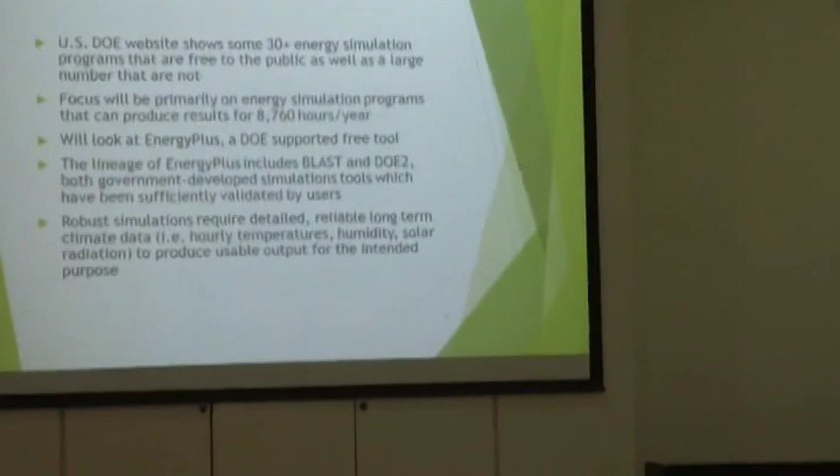So next slide. This is kind of an overview of simulation models. And when we're talking now about simulation, I'm talking about whole building simulation. Annual simulation of the building, all the systems in there, the components in the building. So probably some of you, how many people in here are actually modelers or simulators or have had any experience in that? A few. The rest of you might just be clueless, but this is 250,000 lines of coding that actually simulates a building on an hour-by-hour basis under the influence of all the climatological variables.

And so if you go to the United States Department of Energy website, which anybody can do, there's about 30 plus or so energy simulation programs that are free to the public, as well as a large number that are not. Their focus is really on energy simulations, so it's what we call the 8760, that's how many hours there are in a year. So they just march through the year, and that's what they do. Every hour, they try to bring the system to equilibrium, and then they calculate the energy.

We're going to look at Energy Plus, which happens to be a DOE-supported free tool. What that means is that anybody, anywhere in the world can download that if you want to. Now, I can tell you that if you've never run an energy simulation before, you're going to get into tall weeds very quickly.

Not easy. That's why there's not a whole lot of us that do this kind of work, because you kind of got to be about half crazy to do it. It'll drive you nuts most of the time. I'm completely crazy, but Bing was only half crazy, so she got to do the work.

The lineage of this was a couple of programs that existed from various government agencies in the United States. The old BLAST and DOE2 became the new Energy Plus program. Interesting thing was we had one government agency writing one program, and another government agency writing the other program, and they both did basically the same thing. The weaknesses of one matched up with the strengths of the other and vice versa. So I walked into a meeting one day in research and said, why do we have two of these? That caused Energy Plus to be built from those things coming together. I didn't want to write them, I just wanted to use them. I didn't understand why we had to make choices between the two.

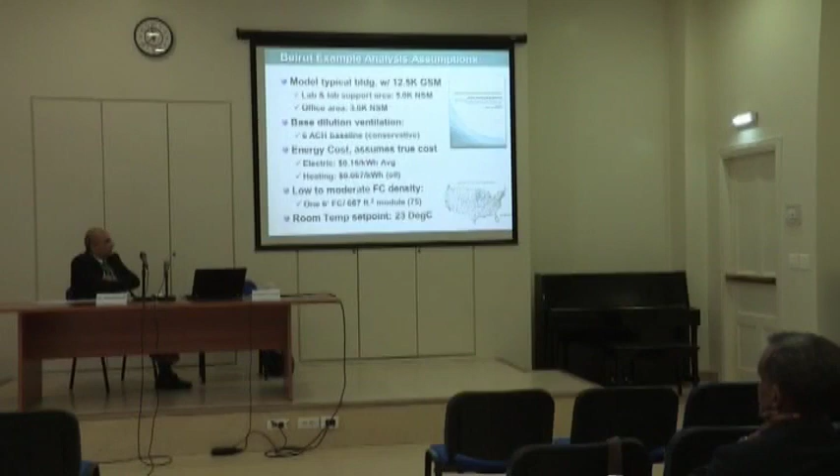Basically what we have is a dilution of a baseline of about 6 air changes. I've got some energy costs here, and basically normal set point temperatures. So when we apply that, the base cost of using the 6 air changes runs at about $615,000 per year.

You can see how that breaks down between cooling, a little bit of heating, some reheat, and then some fan power. We then apply the demand-based approach to that to bring it down to 4 during the day, 2 at night. That's roughly about half the flow, or an average of 3 versus the 6.

So here is the baseline, and now here's the new energy use, obviously less than half, about 53% reduction, and a payback in this case was around 1.6 years. Again, very significant reduction, because we can reduce that airflow rate.

Lastly, I just want to briefly talk about demand control ventilation in commercial buildings. When we talk about laboratories, what about in commercial buildings? The concept, again, is called demand control ventilation. It's been around for a long time. You've probably heard of it. It's recommended by ASHRAE. ASHRAE 62.1 specifically recommends this approach in the standard.

And the problem is it hasn't worked that well, I hate to say. There have been some articles talking about this. The problem is that the traditional sensors that are used tend to drift, as I mentioned earlier.

This is a study done by Lawrence Berkeley National Labs, showing that out of 44 sensors they surveyed in the San Francisco Bay Area, where they're located—again, a Department of Energy laboratory—they found that the far majority, about 80% of the sensors, were drifting high by almost 40%. These sensors should be accurate at 3 to 5%, but they were obviously significantly higher than they should be. If the sensor thinks there's more CO2 in the room, it thinks there are more people in the room, and it drives more flow.

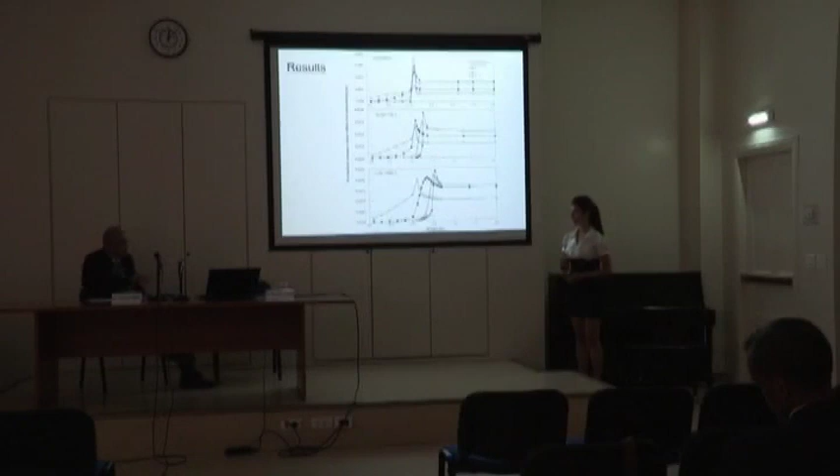As we are mainly interested in reducing cross-contamination between occupants, the intake fraction, which is the normalized concentration at the breathing level of the exposed person, was examined.

To begin with, for a flow rate of 50 liters per second, you can see that for diameters between 1 and 5 microns, the intake fraction increases with particle diameter. However, for particle diameters larger than 5 microns, the intake fraction begins to decrease.

But why? I just said that when the particle diameter increases, the particles accumulate and the risk of cross-contamination increases. However, we should not forget that gravitational effect can play a positive role if floor deposition can overwhelm the upward motion. However, the positive effect created by floor deposition does not cover the entire inhalable range; only for particle diameters larger than 5 microns does this effect become positive.

So we cannot use 50 liters per second, because although floor deposition can act as a positive role for larger particles, for particle diameters lower than 5 microns, the intake fraction is relatively high.

So what we should do is overwhelm the gravitational effect so that floor deposition is weakened and the contaminant is transported upward to be exhausted from the ceiling. When we raise the flow rate from 75 to 100 liters per second, the intake fraction decreased because the removal effectiveness of the displacement ventilation system was strengthened, as the upward motion overwhelms the gravitational effect and prevents particles from accumulating in the occupied zone.

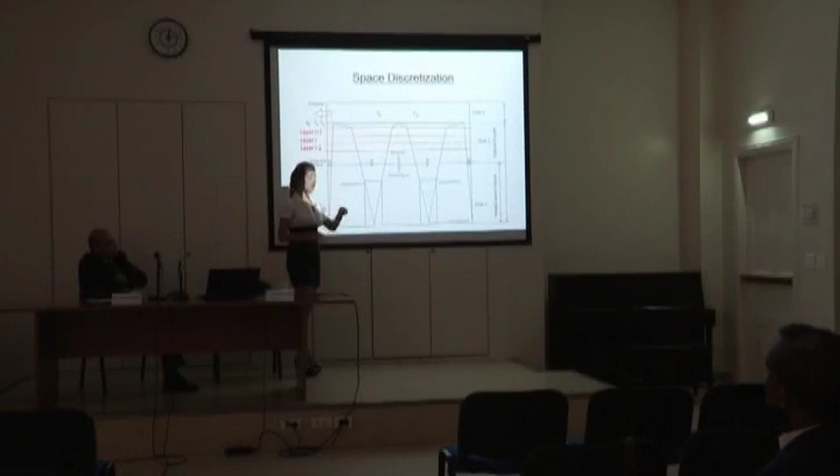Our model is two-dimensional, and as stratification is mainly in the vertical direction, I discretized the space into a high number, approximately 20 layers in the vertical direction, with 3 main zones. In the horizontal direction, I considered lumped regions.

What I mean by lumped region: for example, I have an infected person having a rising thermal plume. Horizontally, I have the region of the infected rising plume, region 1, the exposed rising plume, region 2, the wall plume is region 3, while the surrounding area at the same level is region 4.

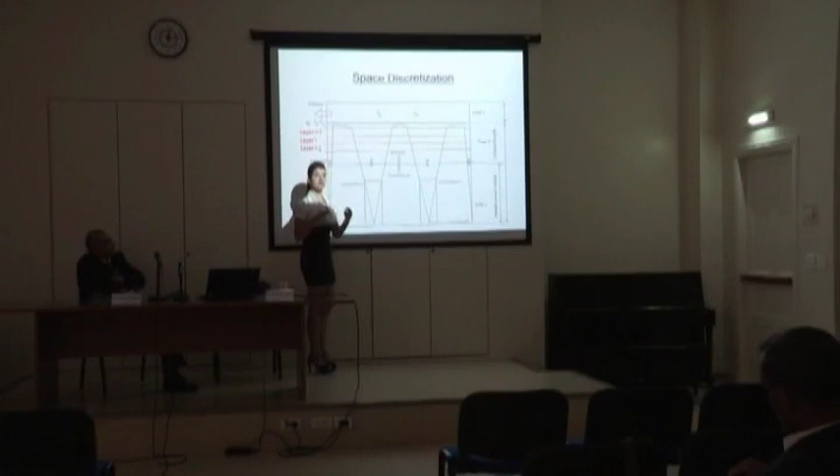Within the equations, I take into consideration interaction between the different regions in the horizontal direction. For example, here is an equation for the concentration within the plume of the infected person. The phenomena are lateral diffusion and entrainment of air by this rising thermal plume from the surrounding air. At the same time, we have vertical buoyant flow and vertical diffusion, in addition to the gravitational effect. In each region, all these physics are modeled, and the equations are coupled together to solve for the concentration within the infected plume, the exposed plume, and the surrounding air.

Concerning furniture, it's true that furniture can affect the flow field, which will affect particle behavior. However, in our case, mainly the upward flow and the rising plume of the occupants are the main causes affecting flow behavior. So neglecting the presence of furniture will have some effect, but not a significant one on particle behavior. For this reason, as this model is simplified, we didn't take into consideration the presence of tables or other furniture.

Any other questions? I have a question. You talked about the stratification height. Usually in design, where do we place this stratification height? Where do we like to have it?

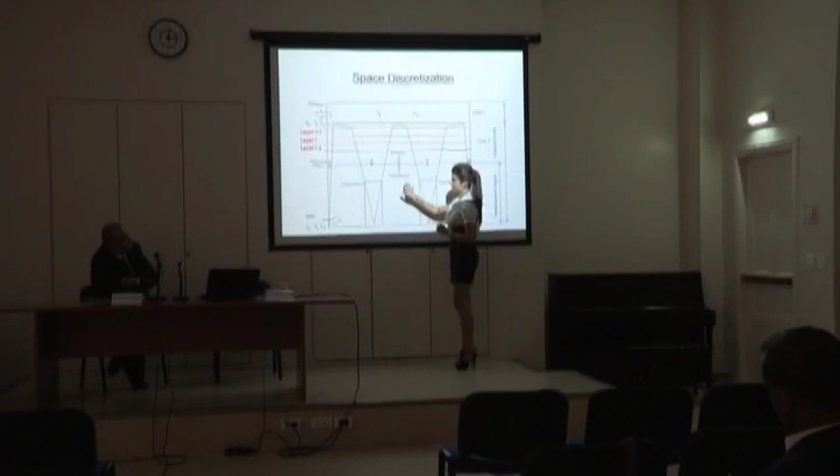Usually, we just say that the stratification height should be above the breathing level. Why? Because below the stratification level, the air is upward, while above it, it's downward, which makes it a critical zone where particles accumulate. When dealing with tracer gas, it completely follows the airflow field, so the tracer gas will accumulate at the stratification level.

So if we ensure that the stratification level is above the breathing level for tracer gas, it will be okay. But the critical inhalable range doesn't cover only tracer gas, but also active particles which have gravitational effect, and this might lead to accumulation of particles below the stratification height. For this reason, it's not enough to have the stratification height a little above the breathing level, but we should have at least 30 centimeters above it to ensure that particles with high diameter will not reach the occupied zone.

Final question: you talked about modeling, and there are a lot of models, but how would I trust the results of the model? Did you do any validation? Sure.

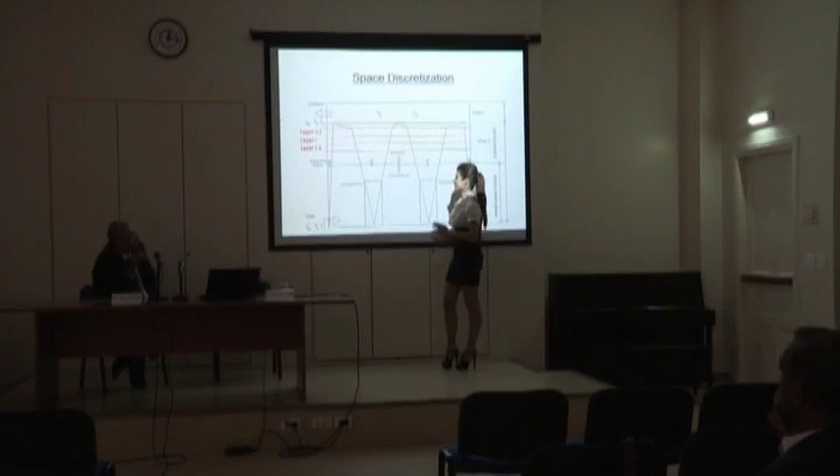Any model that is developed should be validated. We used literature studies and CFD simulation to validate our model. And recently we used experimentation to validate also this model, which was extended to use chair fans to enhance the performance of the DV system. Because we used a much higher flow rate to ensure good indoor air quality for the whole inhalable range, which is not energy efficient. So we should find new engineering strategies to implement in displacement ventilation in order to maintain good indoor air quality while reducing energy consumption.

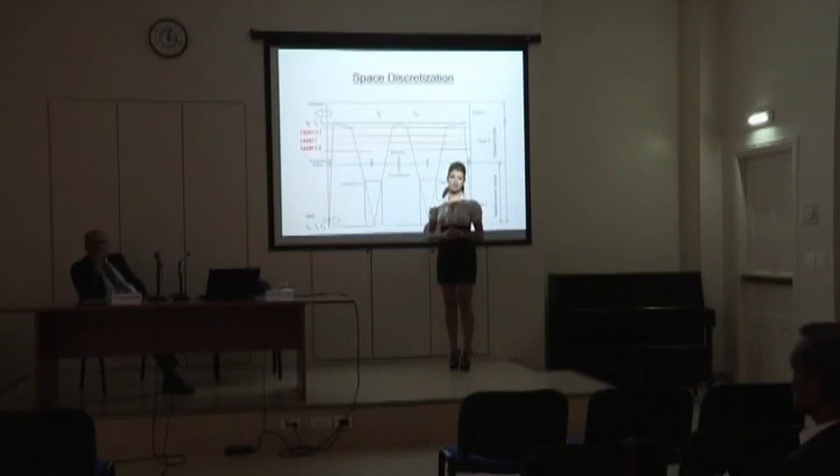Well, I have just a comment. Really great presentation, congratulations. For your infection modeling, as we know, bacterial particles are in the range less than 2 microns. Can you make a comment on what happens to particles in that range? Because you mentioned you studied from 0 to 15 microns. Up or down? Down.

Okay, for example, here we can see the behavior of a 1 micron particle. I tried to see how tracer gas behaves, and I found that the behavior of tracer gas is very similar to the behavior of a 1 micron particle. Displacement ventilation is critical for high particle diameters, but for low particle diameters, the removal effectiveness of displacement ventilation is very good, and for tracer gas I obtain similar results to 1 micron. The effectiveness of DV is highest for 1 micron particles because the gravitational effect is lower, and the peak is nearly always at the stratification level because particles are carried by the airflow field easily, as gravitation does not oppose the upward motion. So I can say that tracer gas behaves very similarly to 1 micron particles, and displacement ventilation is very effective for tracer gases. Thank you very much.

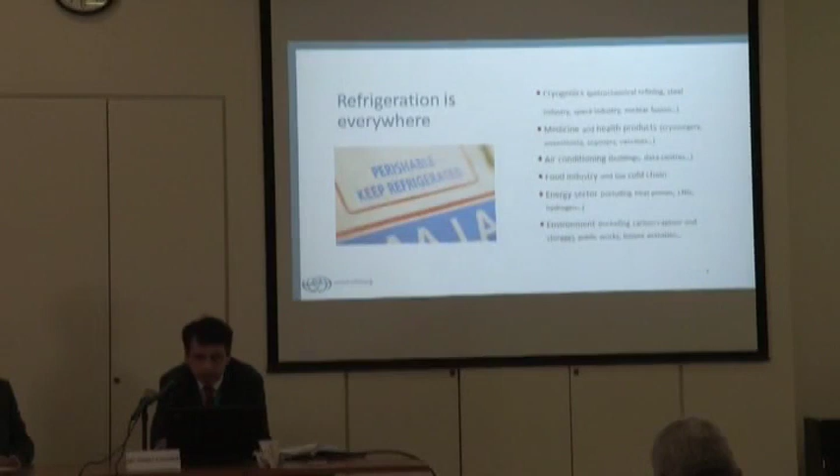In air conditioning, of course, in buildings, data centers, cars, and various vehicles. In the food industry, in the cold chain - for instance to manufacture and prepare food, but also to transport it, store it, and commercialize it. And of course also domestic refrigeration in your apartments or houses.

In the energy sector, including heat pumps - we consider heat pumps one of the refrigeration uses, exactly the same kind of system as refrigeration, being reversible heat pumps for air conditioning or heating. In liquefied natural gas, for instance, more and more gases are used in energy, especially currently liquefied natural gas, but perhaps in the future hydrogen. To liquefy gases you need refrigeration, and liquefied natural gas is currently developing very fast compared to other ways of transporting gases.

In the environment, for instance, we try to develop carbon capture and storage, and for that you need refrigeration to separate the CO2 and afterwards to store it. In public works, you have to isolate the soil for some projects. And in leisure activities, of course, also in mountains and so on.

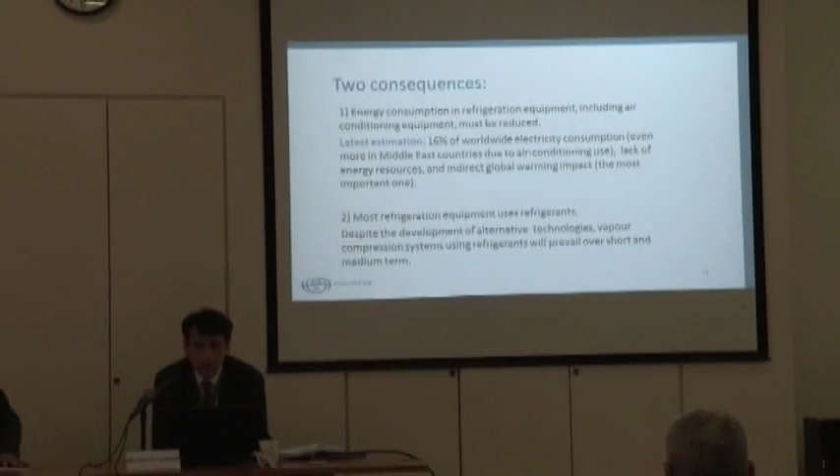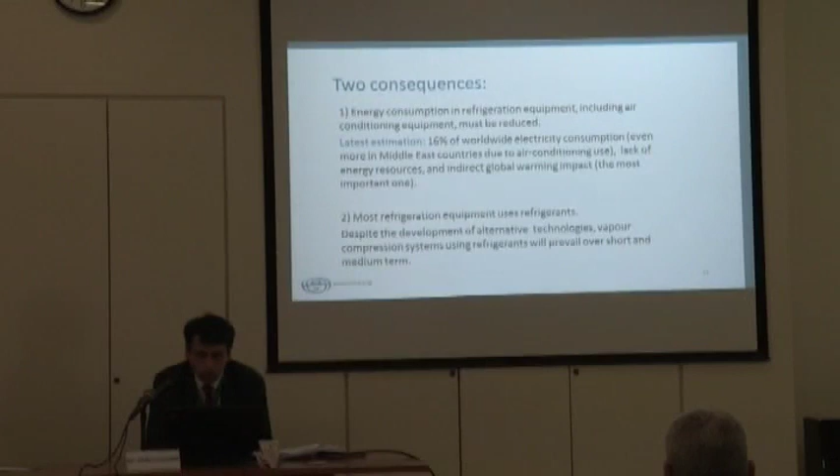It is not negligible, of course. You also have the fact that you need to reduce energy consumption in refrigeration equipment due to the lack of energy resources in the future and the indirect global warming impact, which is the most important. You have a lack of infrastructures, including in the US but also in India, for instance - problems of infrastructure and the cost of electricity in the future. You must know that the indirect global warming impact, because of the use of fossil fuels for electricity production, is the most important one. It is much more important than the environmental global warming impact due to refrigerants.

However, people focus for various reasons on the problem of refrigerants, because most refrigeration equipment uses refrigerants. And despite the development of alternative technologies, which I will tell you a few words about, vapor compression systems using refrigerants will prevail over the short and medium term.

So, a short history to understand the current situation regarding refrigerants, because I will now focus on refrigerants. At the beginning, when refrigeration became a worldwide technology, we had a lot of various refrigerants. But at the beginning of the 20th century, progressively, chlorofluorocarbons became the reference refrigerants, except in the food industry where ammonia was still used a lot.

Unfortunately, in 1974, we discovered that there was a hole in the stratospheric ozone layer, and thus, after a lot of various negotiations, there was an agreement. The Montreal Protocol was signed in 1987, and the aim was to progressively ban all products containing chlorine as well as bromine. Refrigerants, at that period, contained chlorine - as the name chlorofluorocarbons suggests.

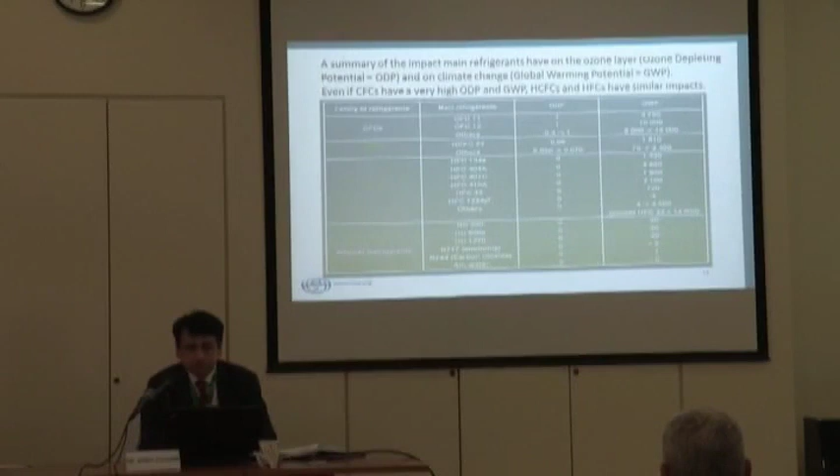Well, in this table, I hope you see the figures. You have in the left column the various families of refrigerants. The second column shows the main refrigerants in these families. Then a column for ozone depleting potential, and a column for global warming potential of the various refrigerants. As you see, CFCs, the chlorofluorocarbons, are bad refrigerants both for ODP, ozone depleting potential, and for global warming potential.

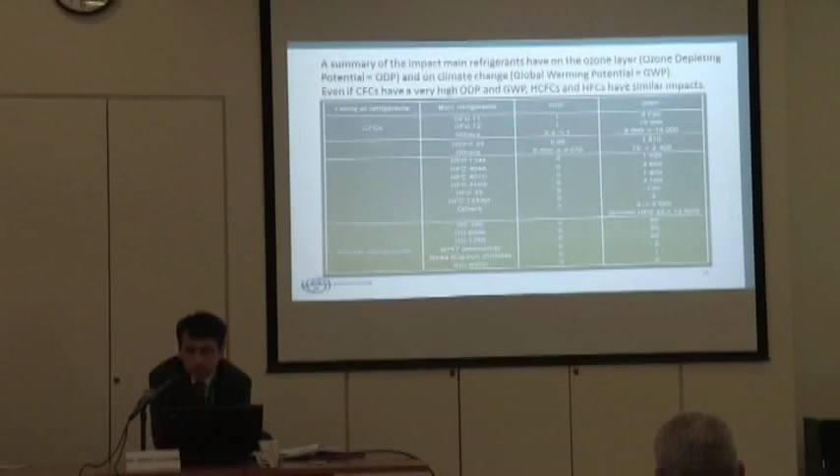When you go to HCFCs, it's much better - you have a very low ozone depleting potential, and a global warming potential which is moderate. When you go to HFCs, the next step, hydrofluorocarbons, you have zero ODP, but a global warming potential that sometimes is very low, sometimes very high. For instance, HFC 404A has a global warming potential higher than current HCFCs. You must understand that going from HCFCs to HFCs without any distinction between the various kinds of HFCs is certainly not good for the climate.

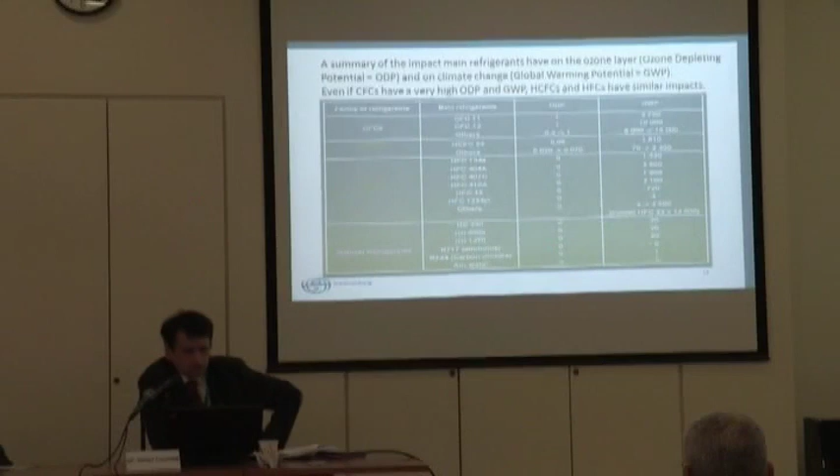At the bottom of these HFCs, you have what we call HFOs, which are unsaturated HFCs. Currently, the figures for HFC 1234YF are not 4, but according to the latest studies, it is a little less than 1. So it is very good. But you have a range which is very high, between 1 and about 4,000. You also have natural refrigerants - hydrocarbons, ammonia, carbon dioxide, air, water - which have a very low global warming potential, and of course, zero ozone depleting potential.

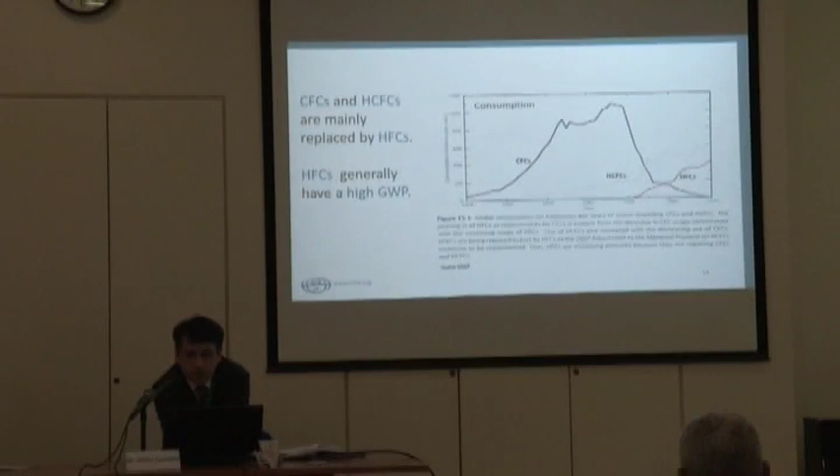So you have some figures from the UNEP report, and we participated in the review of this report. You have the consumption in kilotons of CFCs, then HCFCs, which are increasing because, of course, they replace CFCs, and HFCs, which are replacing both CFCs and HCFCs. So you see in 2010 the level of the various kinds of refrigerants.

And if you have some scenarios which are weighted by CO2 equivalent emissions, these graphics are with CO2 equivalent emissions. So you have CFCs, which are, as I explained, bad. But afterwards you have an increase of HFCs. Of course, it's normal, they are replacing CFCs and HCFCs, and in addition you need more and more refrigerant equipment, and thus more and more refrigerants. So you have various scenarios, and in the worst scenario, in the future, probably in 2050 or a little afterwards, the impact of HFCs, if you don't do anything, would be relatively similar to the impact of CFCs at the beginning regarding the global warming potential. So it is not a catastrophe, but it's important.

Currently, HFCs represent about only 1% of the greenhouse gas emissions, CO2 weighted. About 1%, so it's not a lot. And if you include all the various kinds of refrigerants, it is about 2%. So it is relatively negligible, but because of this increase, it will be important. And you cannot consider that it will be negligible in the various international negotiations.

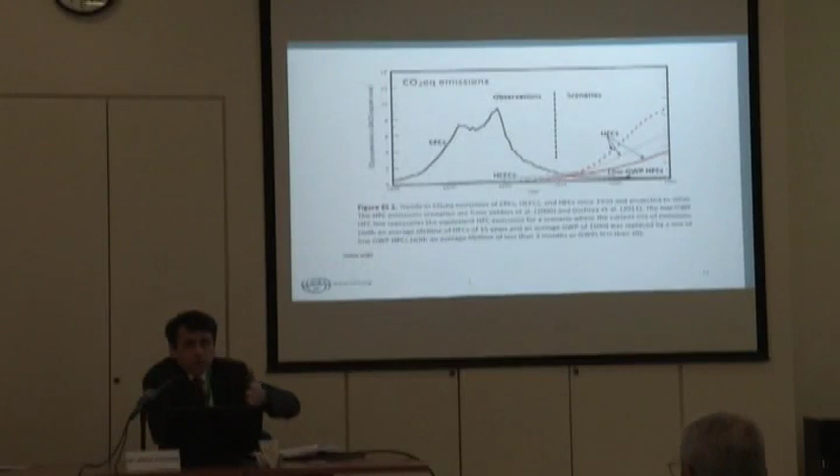You have various scenarios. According to us, the most probable will be about 7% in 2050 if we don't have any additional measures against this increase of HFC consumption. So 7% is not unimportant, it's more than, for instance, the airplanes and so on. So in any case, you have to do something.

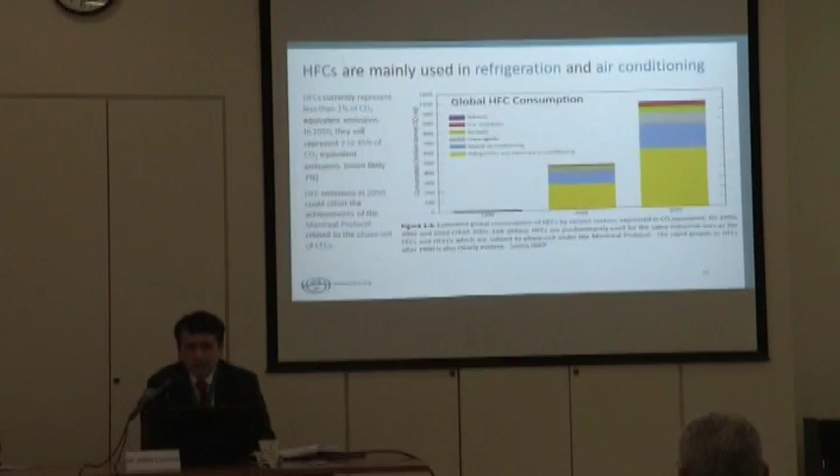Here you have the various uses of HFCs. As you see now, HFCs are mainly for refrigeration and stationary air conditioning, that's in yellow. In blue, you have mobile air conditioning, which is very important. You have foam agents in gray, and it is relatively negligible: aerosols, fire retardants, and solvents. So in any case, if you would like to reduce the HFC consumption and emissions, you have to reduce the emissions in refrigeration, stationary air conditioning, and mobile air conditioning, as well as foams.

Now I would like to explain the international context. Since 2009, each year, North America - Mexico, US, and Canada - and Micronesia, with also some other islands, Mauritius and so on, propose an amendment to the Montreal Protocol in order to phase down HFCs. To phase down means the idea is not to phase out HFCs, because we consider that some HFCs are relatively good for the climate. I mean, for instance, HFOs and so on, certainly the impact is much lower than the current HFCs. So the idea is to phase down the HFCs up to 15% of the baseline.

And since 2009, you have emerging countries, especially India and also Gulf countries, which refuse such an amendment. And thus it is impossible to have an agreement because you don't have agreement of all the countries. And the Montreal Protocol was signed by all the countries. They refuse because, first, they consider that HFCs are not included in the Montreal Protocol. They are included in the Rio Convention and the negotiations on climate change because they have no impact on the ozone layer.

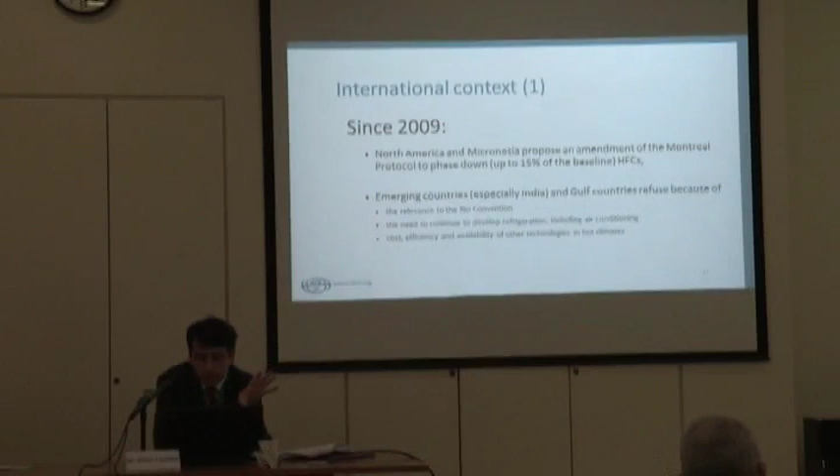Because they consider the need to continue to develop refrigeration, including air conditioning. Of course they need to continue to develop its use. And they consider that there are some problems of cost, efficiency, availability of other technologies than the current HFCs in hot climates. So, well, it's a little boring, but since 2009 and until this year, you have the same kinds of negotiations without any result, between people who would like to have a phase down of HFCs and countries which wouldn't like to have it. But you have to understand that in any case, the conclusion will be a phase down of HFCs, whatever the success of the negotiations, in my opinion.

First, you have to know that, well, of course, the European Union is not a model - I'm European myself, but it is not a model. However, the policy of the European Union will have an influence all over the world. It already has some influence on the policy of the US and policy of Japan, and it will have an influence all over the world. What is the European Union policy?

First, in 2007, it decided to build what we call the F-gas regulation, fluorinated gas regulation. The aim of this regulation was to reduce the leakage through better maintenance and thanks to a certification of companies, certification of people, training people, and thus the idea was to reduce the emissions without any commitment regarding the production and consumption of HFCs. So F-gas regulation, and also in 2007, a MAC directive - it means Mobile Air Conditioning Directive, because as you saw, mobile air conditioning emissions are very important, you have a lot of leakages. So in that case, people decided to totally phase out the current high GWP HFCs.

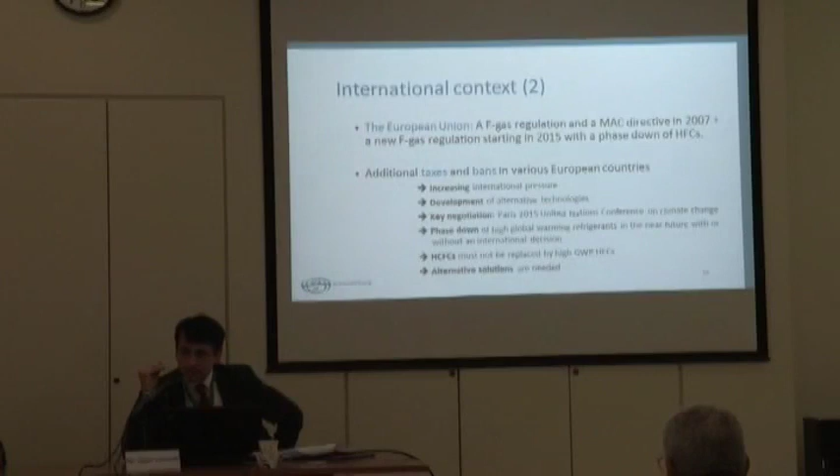The main date to keep in mind is 2015, because there will be a United Nations Conference on Climate Change in Paris, and the aim is to have commitments from all countries to phase down greenhouse gases. If there is a success, there will certainly be some measures regarding HFCs.

I don't know which kind of measures, perhaps including HFCs within the Montreal Protocol or not, but in any case there will be some decisions regarding HFCs if it is a success or a partial success.

In my opinion, because of these international negotiations and the strategy of worldwide private companies, there will be a phase down of high global warming refrigerants in the near future, with or without an international decision. HCFCs must not be replaced by high GWP HFCs, and alternative solutions are needed.

So what are the various technical solutions? First, you can have refrigeration technologies without any refrigerant, so you have no problem at all. There are various technologies: magnetic refrigeration, electrocaloric cooling, cryogenics, meaning for instance you have liquefied nitrogen that you diffuse in a certain area.

You also have absorption, including solar refrigeration. We are working a lot on these various technologies, for instance solar refrigeration, not only because of the energy issue but also for the refrigerant issue, and also magnetic refrigeration.

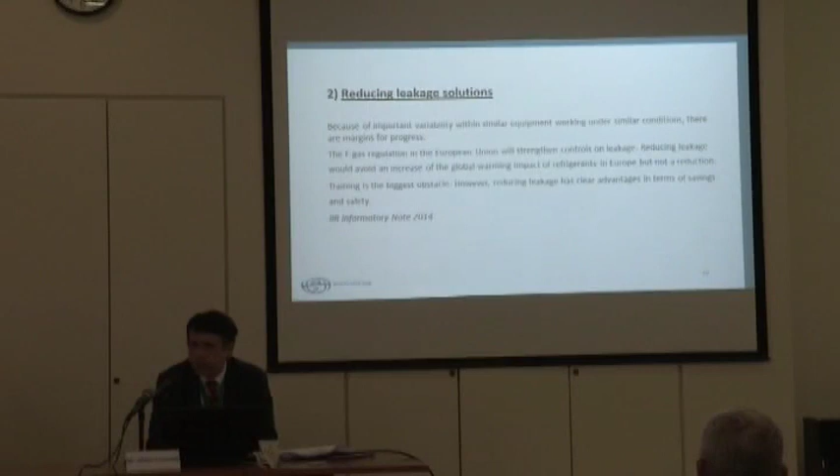Secondly, and this is certainly a short-term solution, you can reduce leakage. For instance, it was the policy of the European Union to reduce leakage, because there is important variability within similar equipment working under similar conditions, so there are certainly margins for progress regarding leakage.

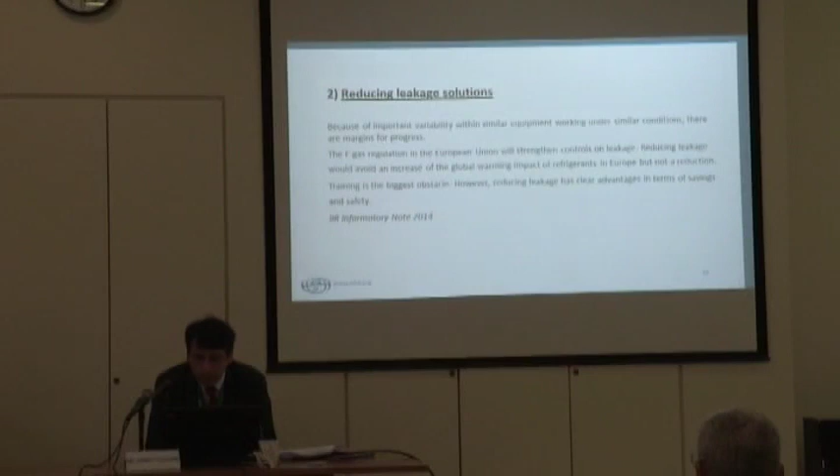The F-gas regulation in the European Union will strengthen controls on leakage. Reducing leakage would avoid an increase of the global warming impact of refrigerants in Europe, but not a reduction. Training is the biggest obstacle, and we certainly have to increase training all over the world regarding leakage.

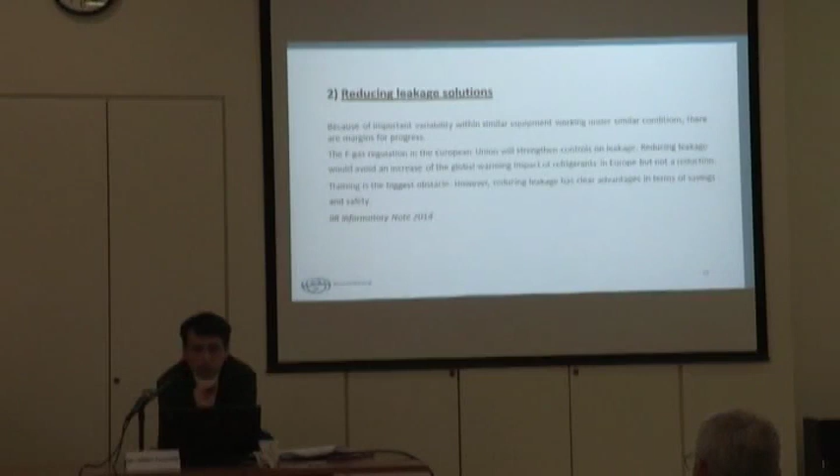However, reducing leakage has clear advantages, not only in terms of environmental impact, but also in terms of savings on refrigerants and on safety. It's very important to understand that safety is a key issue. If you reduce leakage, you reduce safety risks, which is important not only for high global warming refrigerants, but also for low global warming refrigerants.

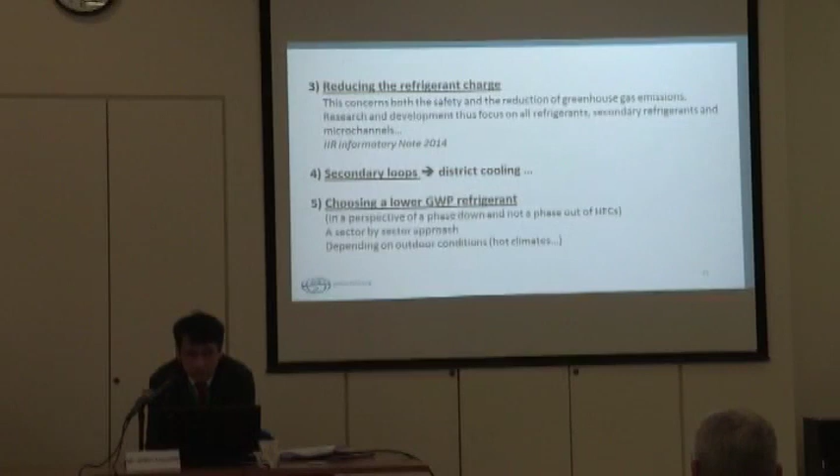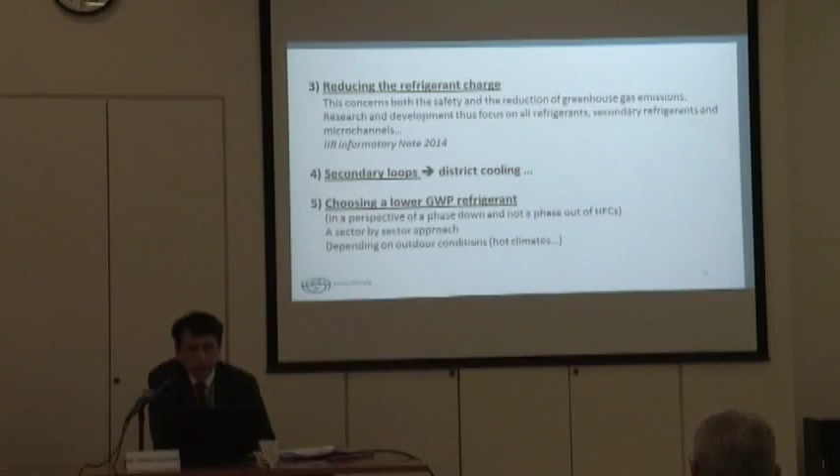Thirdly, reducing the refrigerant charge. This concerns both safety and the reduction of greenhouse gas emissions. Research and development focus on all refrigerants, including natural refrigerants, secondary refrigerants, and microchannels, as well as reduction of leakage. Reducing the refrigerant charge is a good way to reduce the impact and to adopt new refrigerants. We publish informative notes, but I'd like to insist that these technologies don't always require changing the refrigerants. But it will not be enough.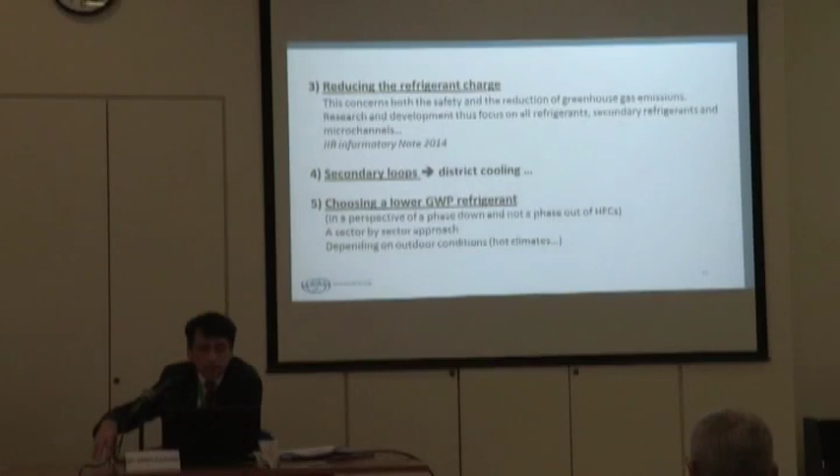I'd like to insist also on the possibility of using secondary loops, not only because it's a good solution for reducing the refrigerant charge and leakage by concentrating the risk, but also for safety, it's very important to consider the risk in a certain controlled place without impact on the public. For instance, for supermarkets, it is dangerous to have hydrocarbons there. You had a recent accident in New Zealand, which was very big. If you concentrate the refrigerant in a certain location, it is much better.

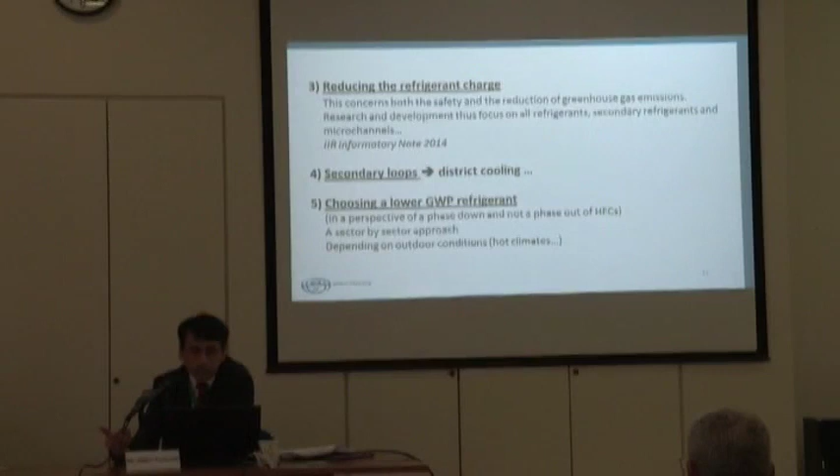You have, for instance, the development of district cooling in various countries, in Europe, in China. I know that we are working with Qatar on district cooling, with Lebanon, with Dubai. There are various solutions. You can design a new system, but you have to think about new systems, and if you are engineers, it's a good opportunity to design them.

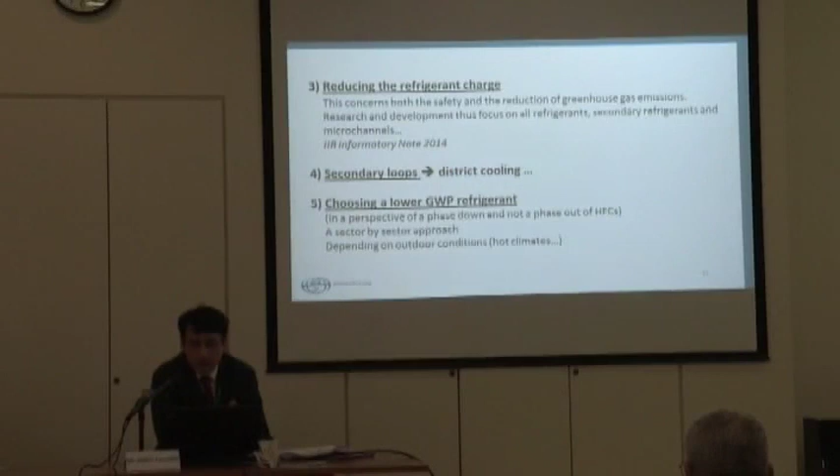And finally, last but not least, in any case you will have to progressively choose lower GWP refrigerants in a perspective of phase down, not a phase out, of HFCs. So the solutions I'll present regarding choosing lower GWP refrigerants are linked with a phase down, not a phase out, but currently, except some environmental non-governmental organizations, nobody actually tries to totally phase out HFCs.

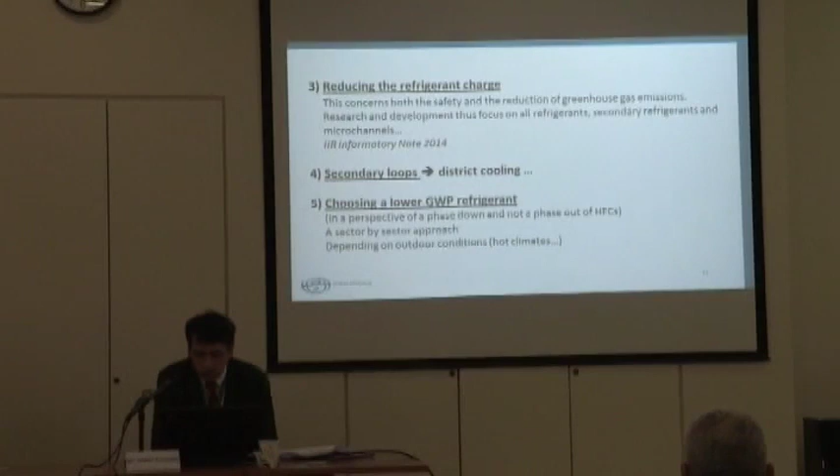Of course, you will need a sector-by-sector approach depending on outdoor conditions, especially regarding hot climates. Well, what are the various possibilities? First, you can use lower GWP HFCs.

Currently you have the development of R32 in Eastern Asia, and some important worldwide companies are trying to develop R32 with various equipment in Asia, but probably worldwide within a few years. It will certainly be a solution because it is simple, well known, and low cost. However, it is mildly flammable, and the problem is it has only moderate GWP, about 720. So you cannot use R32 in all sectors. It's possible to use it in particular sectors to phase down HFCs, but using it in all sectors would be a problem. Don't worry, they don't try to propose it everywhere.

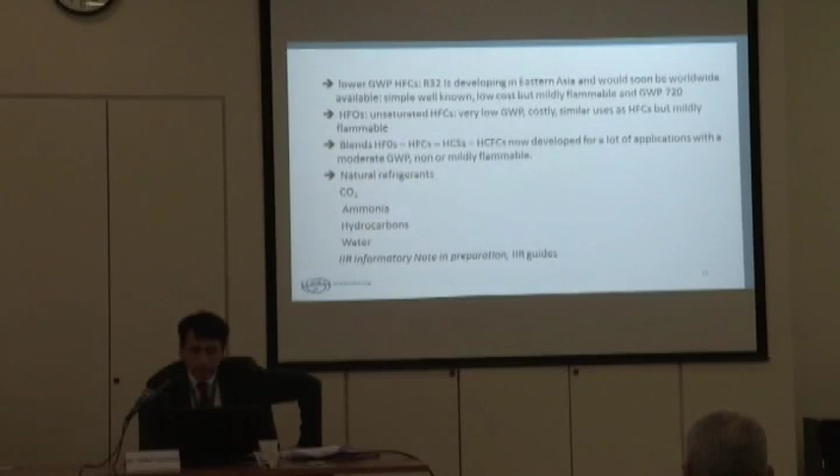HFOs, which are unsaturated HFCs, have a very low GWP, so there's no problem regarding the environment. However, they are currently very costly, much more than current HFCs. They have similar uses as HFCs and are mildly flammable, like R32, but in any case they are developing all over the world. I mentioned air conditioning in cars, but companies producing HFOs are also developing many more applications, including a lot of blends with HFOs, HFCs, hydrocarbons, and HCFCs for many applications with moderate or low GWP.

Some of the blends are non-flammable, others are mildly flammable. Generally speaking, the lower the GWP, when you have very low GWP, you have some risk of flammability, but only mildly flammable. And you have natural refrigerants. You have CO2 as a refrigerant, currently mainly used in moderate climates in Europe and Japan, for instance. But companies are developing transcritical CO2 cascades, trying to progressively move into warmer climates.

Ammonia is still used all over the world, especially in industry, and there are also technical developments to use it in other kinds of applications. Hydrocarbons have seen important development in a lot of developing countries because, of course, they are very cheap. However, they are highly flammable, so there are safety risks people have to care about. Water, for other reasons, is not very developed, but there are publications on that.

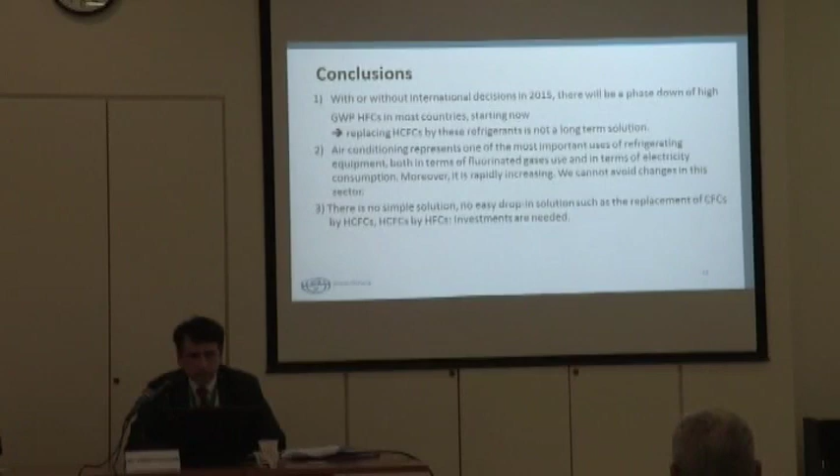Secondly, air conditioning represents one of the most important uses of refrigerating equipment, both in terms of fluorinated gas use and electricity consumption. Moreover, it is rapidly increasing, so we cannot avoid changes in this sector. If you are involved in buildings, you have to take it into account. There is no simple, easy drop-in solution such as the replacement of CFCs by HCFCs, or HCFCs by HFCs, so you need to invest and have some innovations as designers.

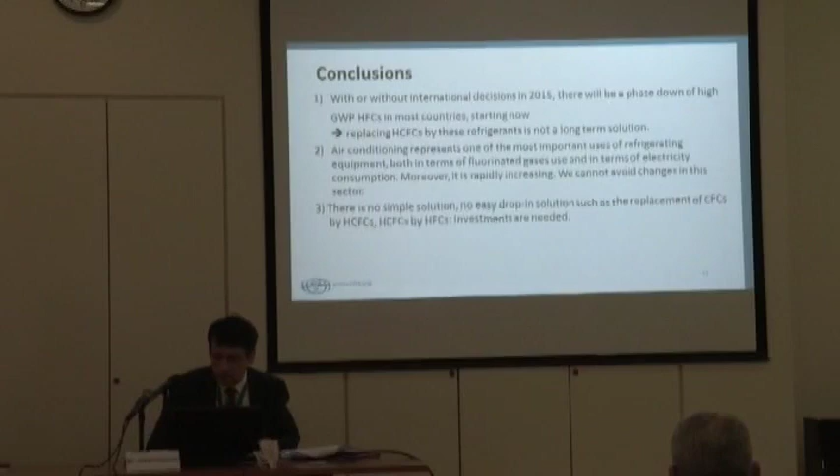Safety issues are important. Regulations might be adapted, and they are progressively adapting. For instance, the US recently decided to use hydrocarbons in domestic refrigeration. It was totally forbidden before, but because people understood it is perfectly safe—in the European Union it is perfectly used without any big accident—in France the government also changed its regulation regarding ammonia, because it was almost impossible to use ammonia in France before. Now it is possible. It is only necessary to compare the various regulations all over the world, and you can adapt these regulations, taking into account the new technologies.

Apart from that, it is very important to participate in international standards definitions, and applying them is also necessary. We currently have a lot of discussions at the international level in ISO technical committees in order to progressively implement new standards or adapt the current ones. So it is very important to be aware of these evolutions, these negotiations, in order to prepare yourselves.

Unfortunately, developing countries, including warm climate countries, are not participating enough in the standard bodies. It is a pity, because in these standard bodies you essentially have people from North America, Europe, and Eastern Asia—not a lot from your countries. I fear the consequence would be that the standards are perhaps not adapted enough to your countries, and you will not be able to rapidly implement them.

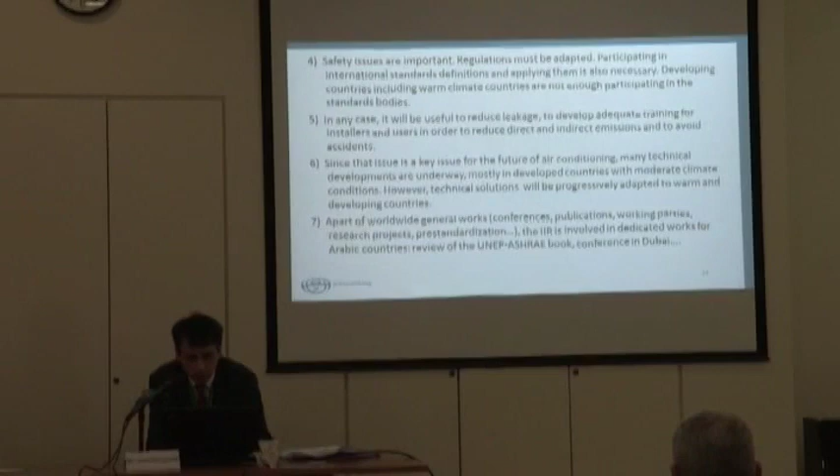Apart from worldwide general works—conferences, publications, working parties, research projects, pre-standardization—there is involvement in dedicated works for other countries; we are working with you. And with increasing needs of refrigeration, you have increasing energy and environmental challenges, and thus increasing needs of the IIR. So you can become a member. Thank you. Merci.

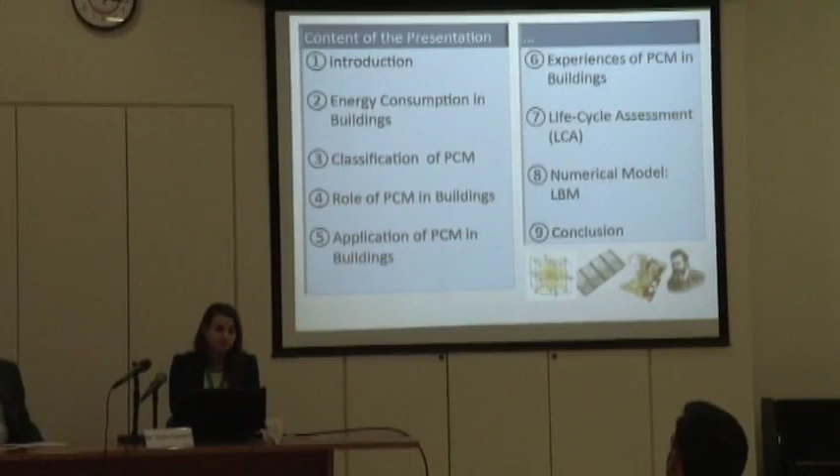Okay, so the content of the presentation will be: first an introduction with information about energy consumption in buildings, the classification of phase change materials and their role in building applications, and experience with phase change materials in different countries, especially focusing on experiences in the Mediterranean regions—Greece, Cyprus, and others. We'll discuss the life cycle assessment of these materials, and last but not least, I will present our proposed numerical model that I was working on during my PhD, based on a mesh-free method, the lattice-Boltzmann method. It's a very new numerical model, and then some conclusions.

Okay, so what is a phase change material? A phase change material is a substance with a high heat of fusion. When melting and solidifying, it is capable of storing and releasing large amounts of energy. Heat is absorbed and/or released when the material changes from solid to liquid or vice versa.

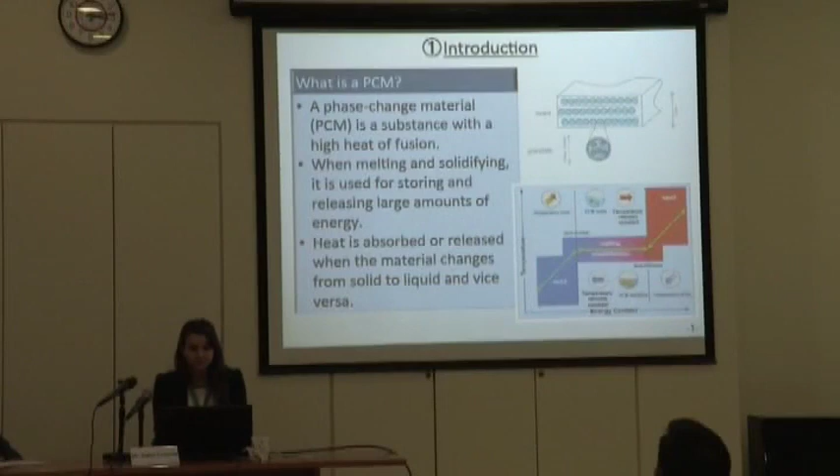According to the statistical review of world energy in 2013, oil remains the world's leading fuel with a consumption of 33.1% of global energy consumption, while hydroelectrical and other renewables have lesser percentages. Especially in undeveloped countries, reliance on fuel is very important, so any enhancement or decrease in this consumption will make a difference. It's not the similar case as in other developed countries.

Why the concern in PCM? In the past decade, the economic situation started to change due to the rise in energy prices. Hence, researchers start to give more attention to the application of phase change materials for heating and cooling in buildings. The number of researches concerned with latent heat storage and phase change materials has been increasing from 1994 till now, 2014.

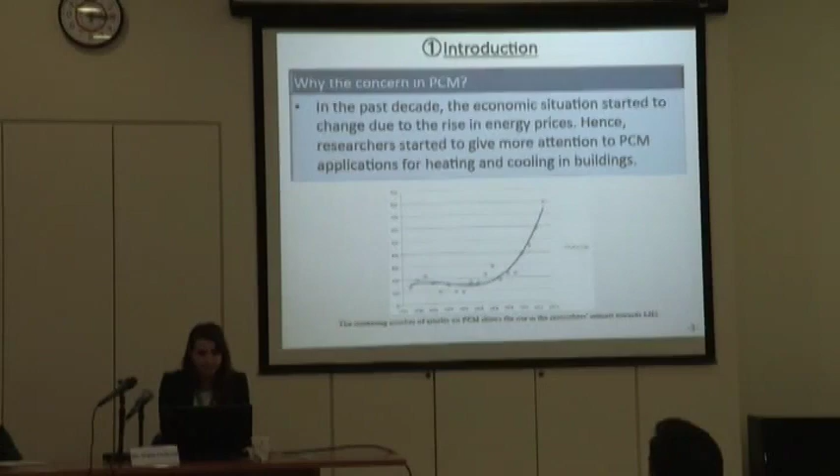The energy consumption in buildings, according to IEA 2008, is 30% in USA, while in Europe it increases to 40%, still less than the world average of 50%. But in undeveloped countries, like Lebanon, we have 70% consumption of energy just in buildings. So as we said before, any enhancement or decrease in this energy consumption will be attractive. So how do we classify the phase change materials?

First, phase change materials can be classified as organic, inorganic, and eutectic. The major ones used in buildings are paraffins and salt hydrates. The choice of phase change material for building application is according to the melting or fusion temperature, which should be within the thermal comfort temperature of a human being, about 23 to 26 degrees Celsius.

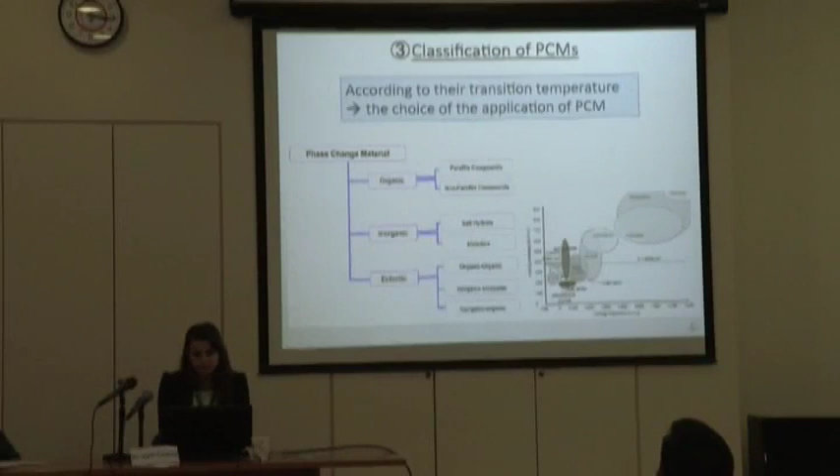The role of phase change materials in buildings: during the day, they absorb heat while melting and consequently reduce the indoor temperature. At night, when room temperatures are low, the phase change material rejects the stored heat, thus preventing the temperature in the room from getting too cold.

So how can we apply these phase change materials in buildings? In buildings, they can be applied in suspended ceilings, as we can see from the figure. During the day, the hot or warmer air will pass through above the ceiling and get a little bit colder, then be rejected to the room. Vice versa, at night, the colder air will go through the ceiling and become a little bit warmer. So we can apply it in ceilings.

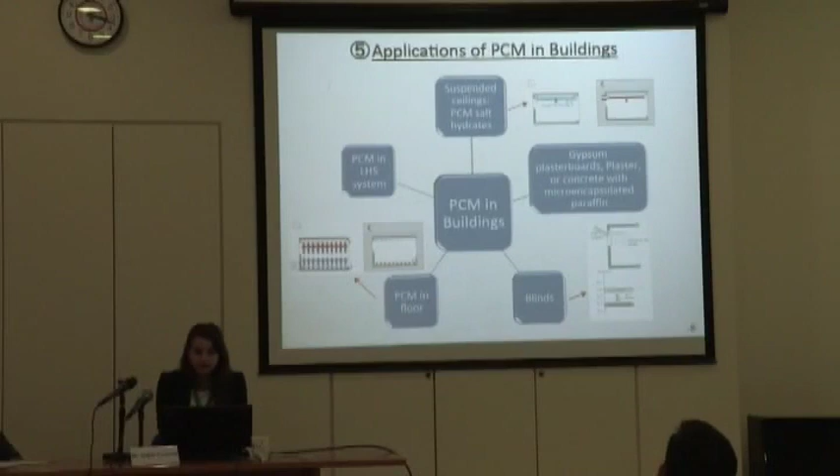We can apply it in plaster boards, concrete, with micro-encapsulated paraffins or paraffin powders. They can be applied in blinds, floors, and also in latent heat storage systems.

What are some experiences of phase change materials in buildings? In 1997, Athienitis and partners made experiments on PCM gypsum board in a passive solar building. The total temperature in the room was decreased by 4 degrees Celsius. In 2013, Zalewski and partners, in our laboratory, made experiments on mortar with micro-encapsulated phase change materials. We noticed a 41% increase in the stored energy, or the energy which is released.

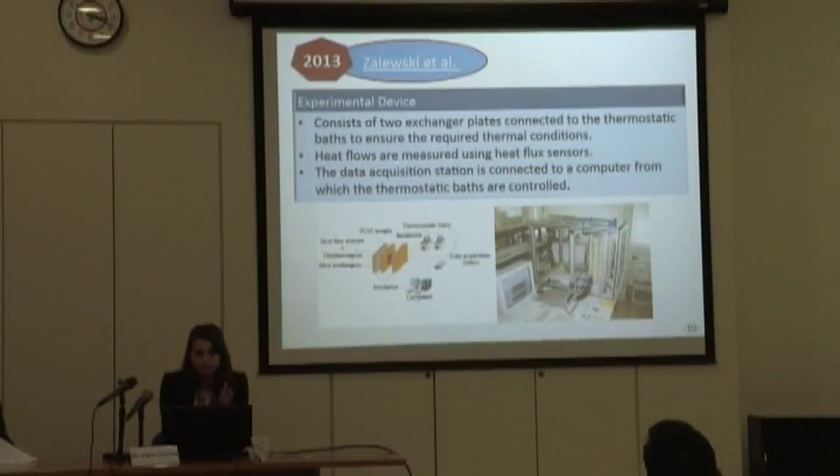A little bit about the experimental devices we are using in our laboratory: we test samples of different dimensions. This experimental device consists of 2 exchanger plates connected to thermostat baths to ensure the required thermal conditions. The samples are placed between these 2 plates. Heat flows are measured using heat flux sensors. The data acquisition station is connected to a computer from which we control the thermostatic baths. As we can see, this is a picture of the machine.

Other experiences were done in the Mediterranean region. In Cyprus, also in 2012, experiments were made. A decrease of 1.6 degrees Celsius was noted for a 15 millimeter phase change material, with a reduction of 41.2% in cooling energy. This was applied in a house with low thermal mass. Little efficacy was noted for higher thermal mass buildings.

In Cyprus, also, Panayiotou and partners in 2013 used a macro-encapsulated phase change material.

There was noticed also a 28.59% of energy, while this amount increased when we used adequate insulation with the phase change material, which proves that when using a phase change material with adequate insulation, we have better performance of the phase change materials. It increased to 66.17% in reduction.

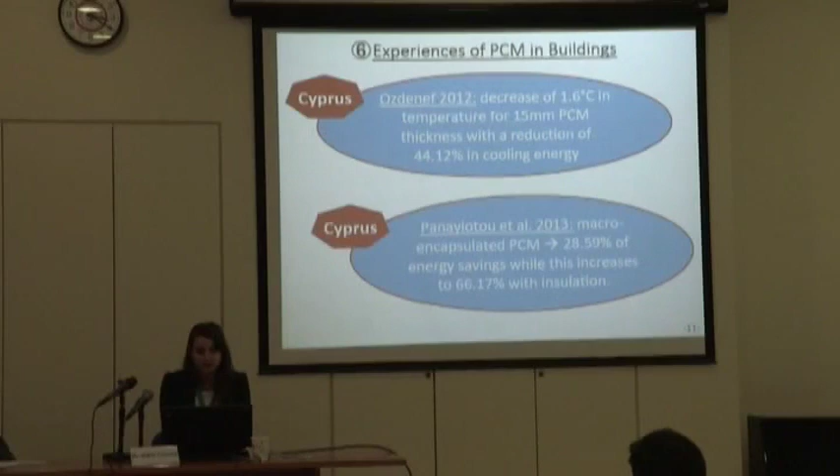In Greece, Mandilaris and partners made an experiment on an unoccupied typical house with no energy system. They used multi-layers of insulation materials with gypsum plasterboard panels containing phase change materials. There was a decrease in the decrement factor from 30 to 40% and an increase in the time lag of 100 minutes, which means we have increased the thermal mass of the buildings.

In Spain, experiments were done on cubicles with salt hydrate phase change materials added to the walls. Energy consumption decreased by 0.86%, which is not very good. But when they used set points closer to the melting point, this increased to 15%.

So we come to a conclusion that phase change materials showed better behavior during summer conditions than during winter, because they behaved a little bit like insulation, and they showed better performance when used with adequate insulation and when used for a longer period of time.

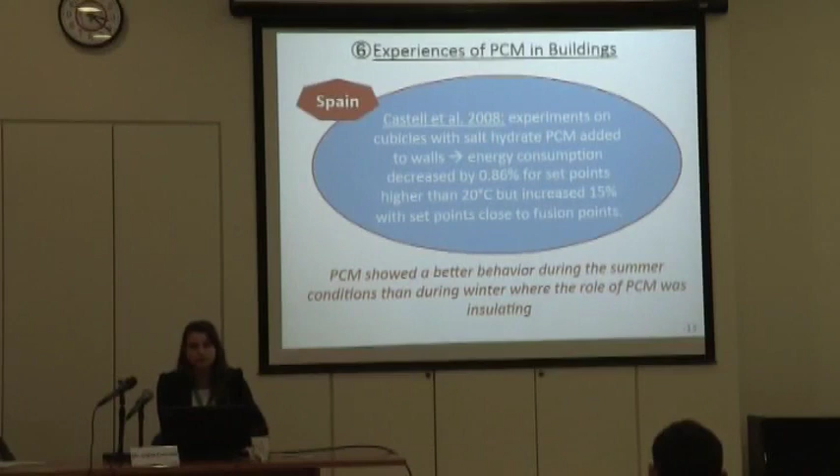As for the life cycle assessment, by definition, it is the process used to quantify and evaluate the environmental impacts, known as life cycle assessment. So why are we discussing this?

The aim is to analyze if these energy savings are large enough to balance the environmental impacts originated from the manufacturing of phase change materials, also because one of the disadvantages of using phase change materials is their initial high cost. So we are going to discuss the return period of these phase change materials and if it was promising.

Phase change materials must operate as long as possible during the year to reduce the operational impact. Second, the phase change materials' benefits increase in locations where the weather conditions are similar, so that we can use them for more cycles during the year.

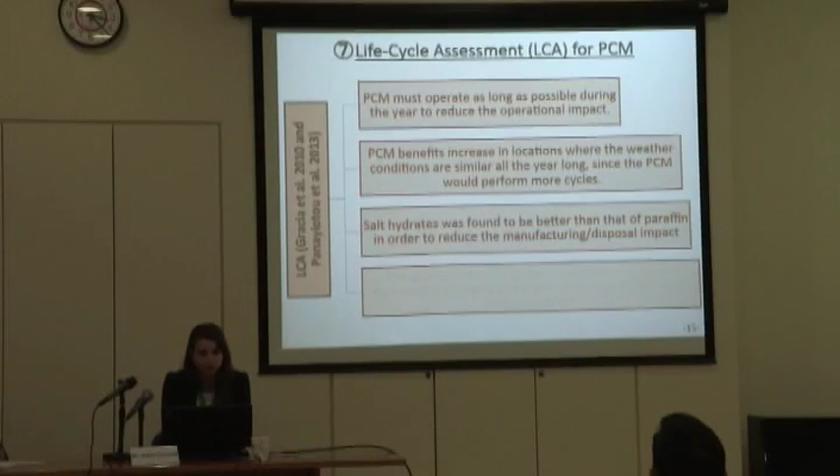Salt hydrates as phase change materials were found to be better than paraffins in reducing manufacturing/disposal impact. The global payback of phase change materials was less for salt hydrates than for paraffins. There was a study in Cyprus for a building: when they didn't consider insulation, the payback period was 14 years, but when they used adequate insulation, it was 7.5 years. Still, this is due to the initial high costs of phase change materials.

Now, according to the numerical model, we have developed a numerical model based on the Lattice-Boltzmann method, which is a mesh-free method. The Lattice-Boltzmann method has a tendency to simulate complex physical problems, including multi-fluid flows, heat transfer, solute transport, and phase changes.

It deals with the presence of multiple phases, complex geometries, and porous medium. It was a little bit challenging to start with this numerical model, but this model has more tendency to be developed because of the simplicity in numerical modeling and its wide applications. So the Lattice-Boltzmann method has been achieving great success in these fields since its emergence because of its distinctive advantages over conventional CFD models. A brief view on the Lattice-Boltzmann method.

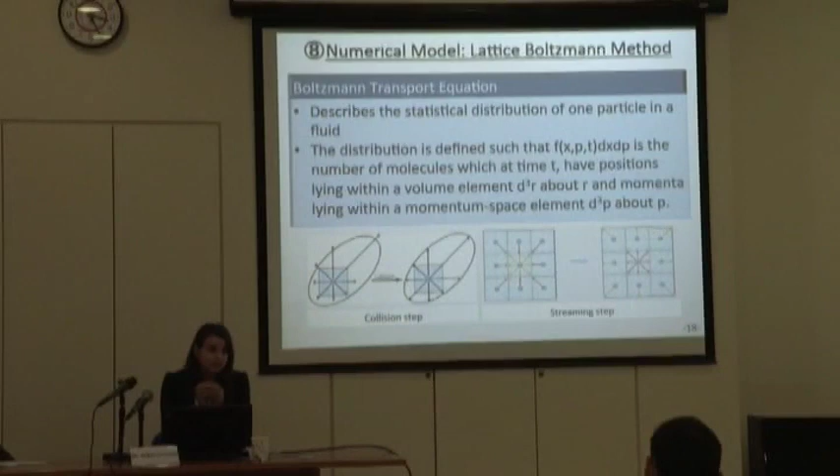In the collision step, the particles collide and exchange energy according to the Maxwell-Boltzmann distribution, giving a new distribution function. The macroscopic velocities, densities, temperature, and all macroscopic values are determined from the summation of these distribution functions around each lattice node. This is the lattice Boltzmann equation.

It contains the time variation, spatial variation, effect of a force acting on a particle, and the collision term. This collision term is a complex integral-differential term, but it was simplified to a single relaxation time lattice Boltzmann method that is only related to viscosity, so it became a very simple equation.

Fi can represent a velocity field, an energy field, temperature, or any order parameter. So only one simple first order differential equation represents the whole physics. By the same equation we can calculate temperature and velocity, but we have to use multiple distribution functions, like two, to calculate the velocity and the temperature. So for each field we have to use a distribution function.

For phase change materials, the phenomena of melting and solidification are widely present in many industrial applications like geosciences, industries, and materials. So our aim is to develop a numerical model to simulate the phase change process and apply it to phase change materials.

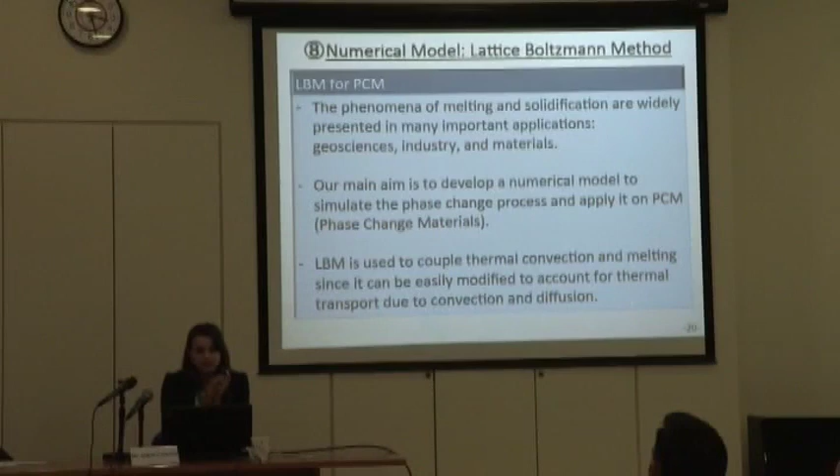The lattice Boltzmann model is used to couple thermal convection. We have introduced convection and melting, and it can be easily modified to account for thermal transfer due to convection and diffusion. The mathematical formulation includes the continuity equation, the momentum equation, and the energy equation.

For the lattice Boltzmann model, we use two distribution functions: one for the velocity field and another for the temperature field. These two simple discretized equations, when choosing tau f, the relaxation factor related to viscosity, allow us to retrieve the momentum equation. And when using tau h, the heat transfer relaxation parameter related to diffusivity, we can retrieve the energy equation. Here we have also added a Boussinesq force.

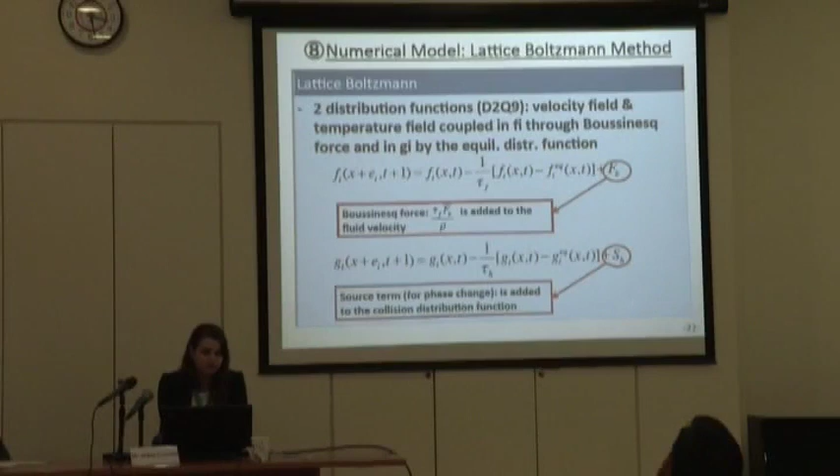This force is added to the fluid velocity. We have also added, in the energy equation, a source term to account for the phase change, and it is added in the collision distribution function.

The numerical model is verified through a well-known benchmark problem. As we can see, we have a phase change, whether in a rectangular or square cavity.

As we can see, the position of the melting fronts for different dimensionless times shows a transformation from a conduction regime to a partial convection regime to a fully convective regime.

Optimization of the phase change enclosure: in my PhD, we worked on octadecane in plexiglass for glass facades. We started our experiments on a plexiglass enclosure containing octadecane with an aspect ratio of 20, which is 1 centimeter versus 20 centimeters.

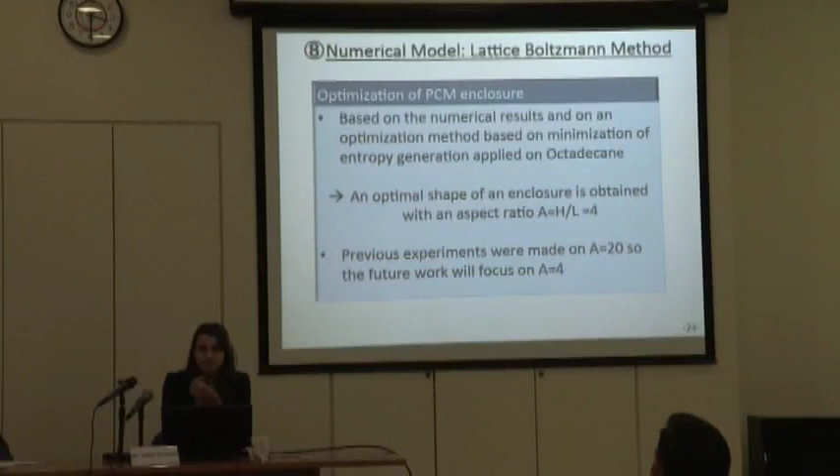When we applied the numerical model, we tried to optimize the enclosure dimensions to achieve better performance and better energy storage, and then ordered additional samples with the new dimensions. The optimal shape was found with an aspect ratio A equal to 4, H/L, instead of A equal to 20.

As a conclusion, our experimental results show that phase change materials are more effective in hot weather than as insulators in winter. The application of phase change materials on the envelope of dwellings in Mediterranean countries is considered a very attractive solution in terms of energy savings and comfort.

Nevertheless, a major disadvantage remains the high initial cost of phase change materials. Previous experiences show that integrating phase change materials in buildings with adequate insulation would improve thermal capacity and reduce energy consumption.

The increasing number of studies on phase change materials in many Mediterranean countries like Cyprus, Greece, and other neighboring countries should prompt discussion in our own country, Lebanon, where energy saving is vital due to the increasing price of fuel, which is our major reliance.

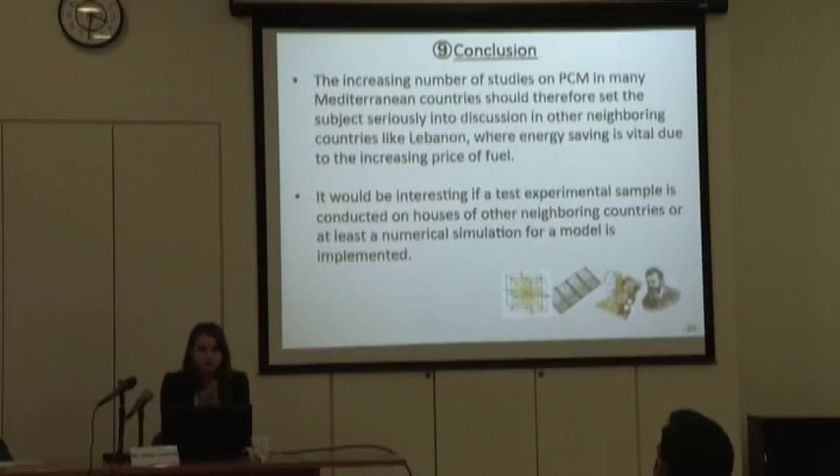It would be interesting if a test sample were conducted on houses in our country, or at least a numerical simulation model for an implemented one.

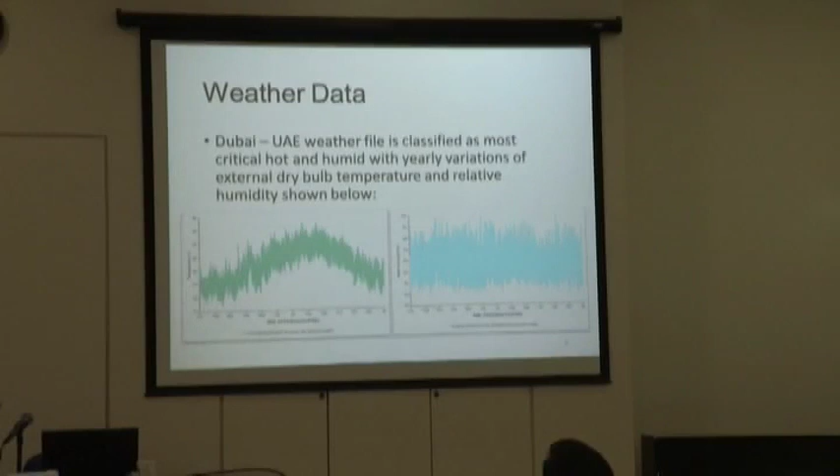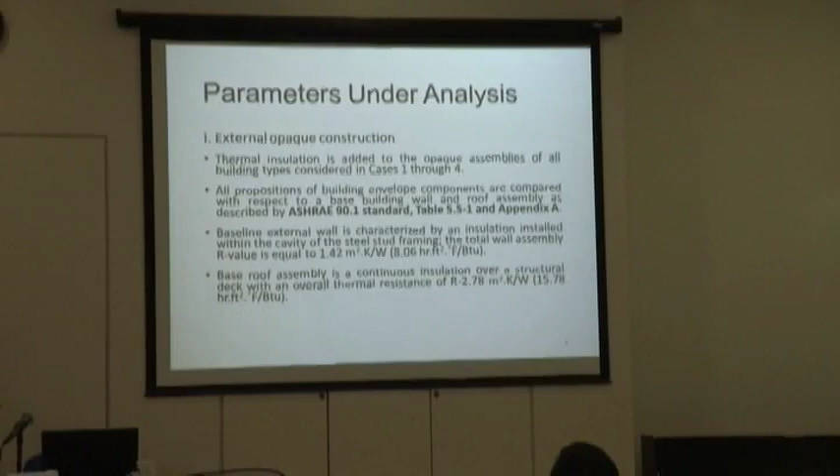So what are the parameters of the analysis? We start with the external opaque construction. Thermal insulation is added to the opaque assemblies of all building types considered from cases 1 through 4. All proposals for the building envelope components are compared to a base building wall and roof assembly in ASHRAE. The baseline external wall is characterized by insulation installed within the cavity of the steel stud framing, with a thermal resistivity of 1.42. The base roof also has continuous insulation over the structure with an overall thermal resistance of 2.78.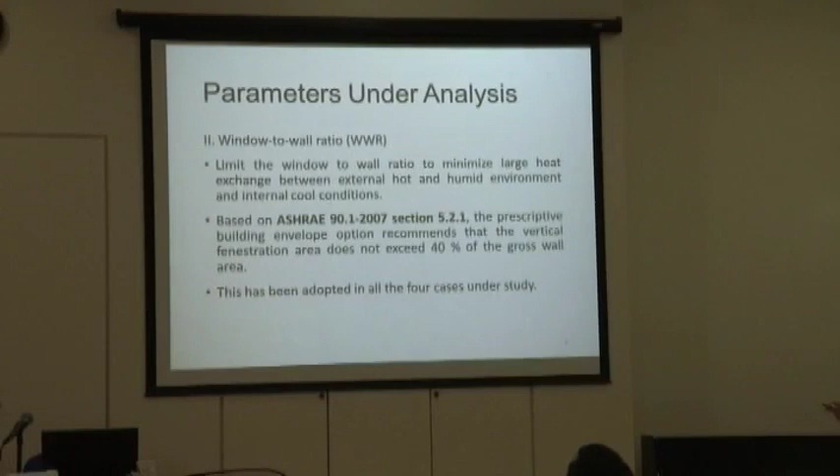For shading, in the 4 cases we studied we used an Islamic arcade as shading, extruded overhangs, and multiple vertical fins. Further on, the shading coefficient: it is known that the lower the shading coefficient, the lower the heat gain into the building. The three levels of shading coefficient used were 0.28, 0.4, and 0.2.

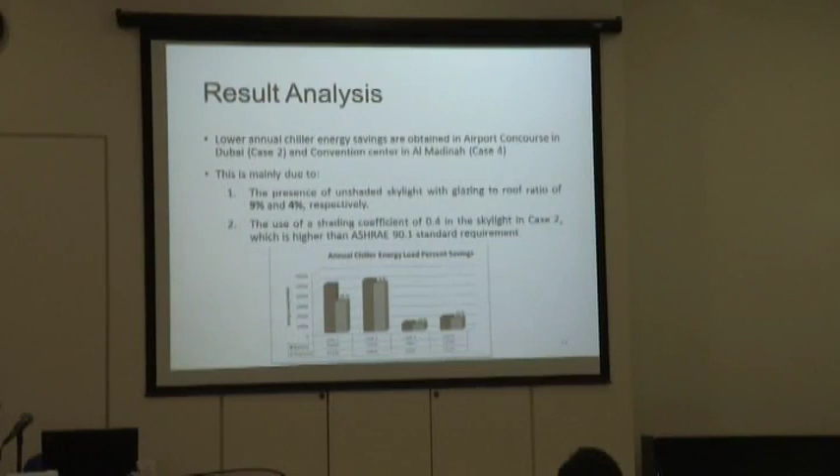So what's happening in cases 2 and 4? You notice they're lower than the other cases. This lower saving is due to the presence of an unshaded skylight, with a high glazing-to-roof ratio of 9% and 4% in cases 2 and 4. Also in case 2, the very low saving is due to the shading coefficient being 0.4, which is higher than the ASHRAE baseline.

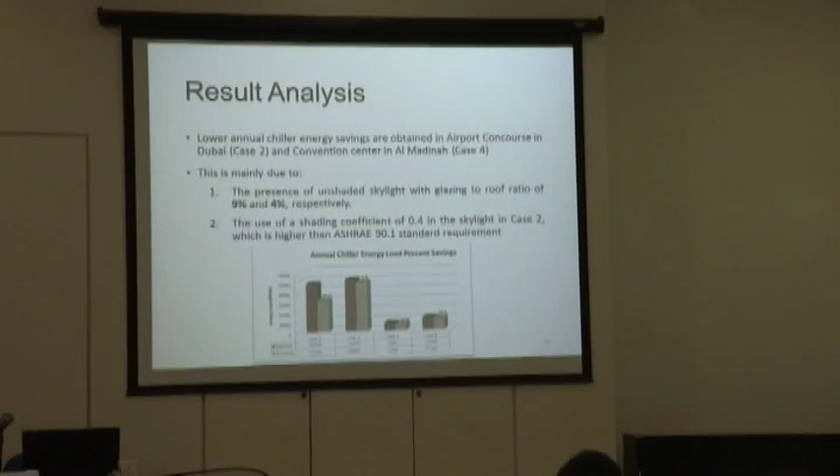Okay, so we're done with the building envelope and the optimization we did. Further to this, we want to obtain more occupant comfort, so we address the hygrothermal assessment.

What are the parameters needed for this assessment? Three main parameters are needed: the external environment conditions, the interior environment, and the thermal vapor properties of the wall structure. First, it is important to seal the building assembly to reduce air leakage from air cavities in the wall and ceiling. Also, the temperature at each wall construction layer, referred to as the interface layer, must be greater than the total dew point temperature of the whole assembly. Finally, to prevent potential mold growth and condensation, the relative humidity at any layer of the construction must be less than 75%.

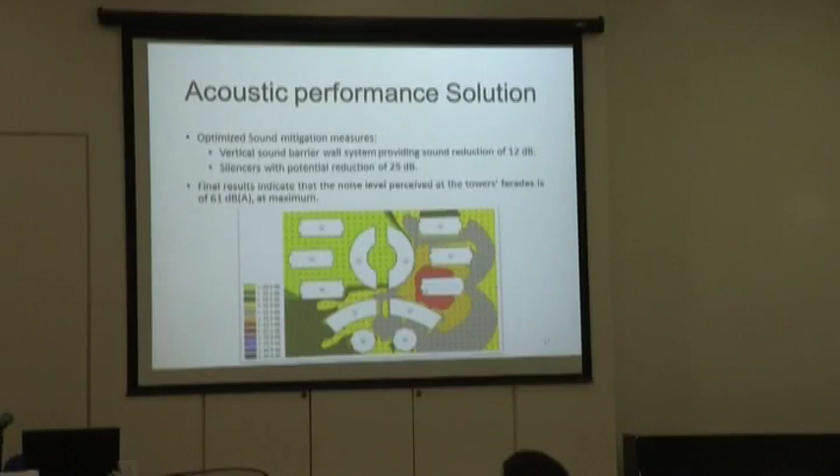Finally, what's the conclusion? The main objective of this study was to investigate the building's sustainable designs that can bring significant performance benefits in order to reduce energy consumption. The parameters under study were window-to-wall ratio, the U-values of the wall, and the U-values of the glazing and their corresponding shading coefficient.

The annual chiller energy load percentage savings achieved for the four case studies, compared to the baseline ASHRAE 90.1 model, were achieved due to optimization of the above-mentioned parameters. Finally, sustainable high-performance design is further coupled with prevention of the transmission of hot and humid air and disturbing noise into occupied spaces, thus enhancing indoor air quality and occupant comfort.

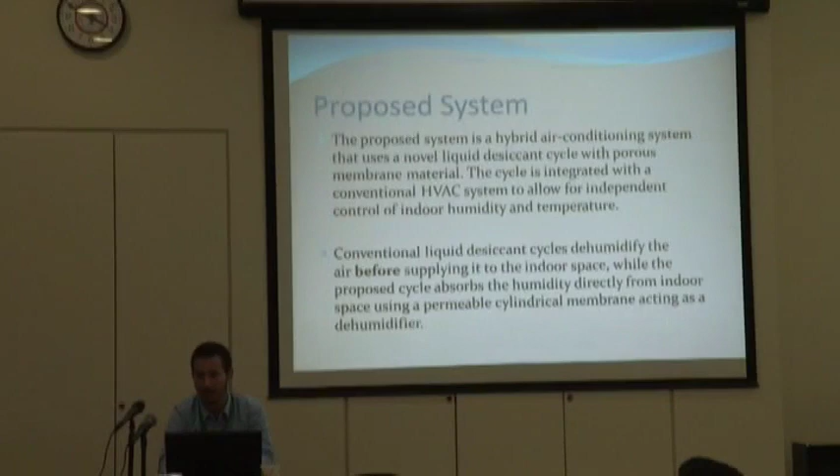The conventional liquid desiccant systems dehumidify the air usually before it enters the indoor space. This proposed cycle will dehumidify the indoor air directly from the space using permeable cylindrical membranes that will act as a dehumidifier in one stage and as a regenerator in another stage.

The air leaving the indoor space will also be cooled using evaporative cooling to ensure that the liquid desiccant entering the space will not impose a sensible load on the closed space and will not increase its temperature, and also to increase the potential of the liquid desiccant to absorb more moisture from the indoor space.

The size of our system is quite significantly reduced compared to the old conventional cycles that usually use cooling towers and regenerators or even desiccant wheels.

It's important to control the humidity and the temperature for three main reasons. The first is the sustainability of the building material or the energy consumption, and most importantly, the thermal comfort of the occupants inside the space.

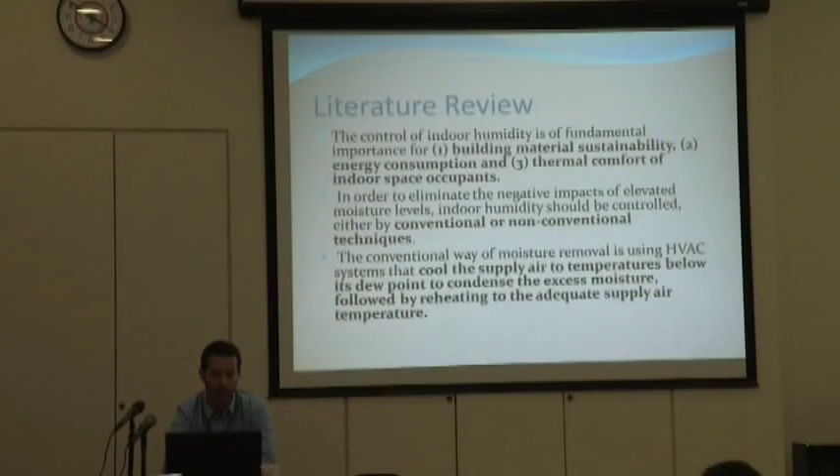To eliminate this negative effect of moisture level indoors, we can use either conventional or non-conventional techniques such as the desiccant technique. The conventional techniques usually cool the air before it enters the room to the dew point temperature, where it condenses and loses all the excess moisture, followed by a reheat to increase the temperature and make the air adequate for the indoor space.

Two main issues can rise from using the desiccant technology. Mainly, the direct contact of the desiccant might cause health issues because some desiccants might be toxic, for example lithium bromide. That's why in our experiment we replaced lithium bromide with calcium chloride.

The second issue is that dehumidifying the air outside the indoor room requires the air coming into the room to be at a much lower humidity ratio than the indoor air. This requires a very strong desiccant, and this desiccant might be strong at the cost of being toxic.

But fortunately, some studies and the HAMP studies have shown that direct cooling and dehumidification is effective. It responds directly to changes in the latent and sensible load, and it does not require a strong liquid desiccant for the experiment.

The HAMP, which is the heat and moisture transfer panel, is able to control both relative humidity and temperature using the liquid desiccant as a working fluid.

This panel absorbs the moisture directly from the room, and the main concern about this HAMP was the ability to regenerate the desiccant or even cool it, and the energy needed to regenerate or cool it.

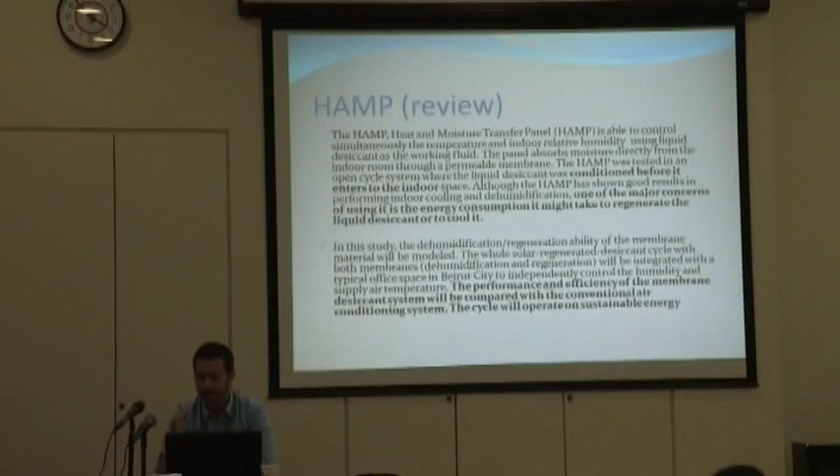In our study, the dehumidification and regeneration ability of the membrane material will be modeled, and we will compare its efficiency to those of conventional systems.

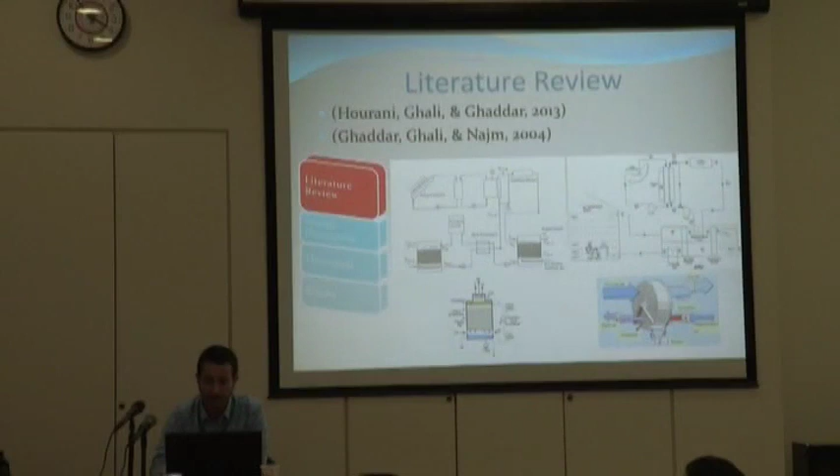The liquid desiccant will enter the indoor space at a temperature low enough to allow it to absorb all the humidity inside the air room, and it will exit at point 2. The pipes where the liquid desiccant enters are made of permeable membrane that allows the transfer of water vapor, but not liquid water.

The pumping here is in solid pipes that will actually be heated by two sources. The first source is a heat exchanger that will be heated by the flow coming back from the regeneration pipes.

It will also be heated by the solar heat input, which is made mainly of parabolic heat collectors that are supposed to collect and store heat inside a storage tank. This heat will allow the liquid desiccant to reach a certain temperature.

We call this temperature the regeneration temperature, where it will be able to, if it passes through a permeable membrane, lose all the absorbed water vapor to the ambient air.

After it goes out from the regeneration pipes, it will be cooled by two heat exchangers: the auxiliary heat exchanger and the heat exchanger that is actually heating the liquid desiccant. To ensure that the temperature will not impose any sensible load increase inside the indoor room, and to increase the potential of the liquid desiccant to absorb more water vapor, we will cool it by evaporative cooling before it enters the room.

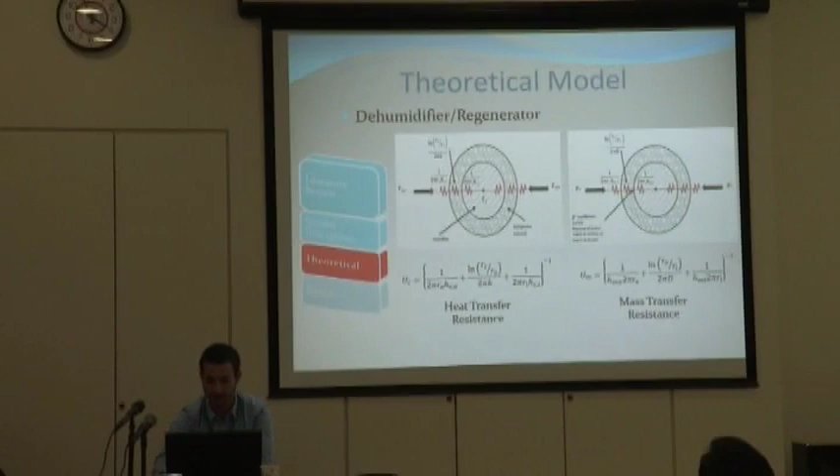Each term is for the outside or internal convective resistance, and similarly for the mass transfer resistance. The liquid desiccant and the permeable membrane are modeled by energy balances and species balances. The energy balances model the solution coming in and out of the system.

We can see here that we have a difference in partial pressures. This difference in partial pressure will actually be the force that causes the transfer of water vapor from inside the indoor space to the permeable membrane at low temperatures, and at high temperatures it will reverse, flowing from inside the liquid desiccant pipes, through the permeable membranes, to the outside room.

And this is finally the model of the room, the indoor space. We have an energy balance, and we have a species balance also, because it's losing moisture.

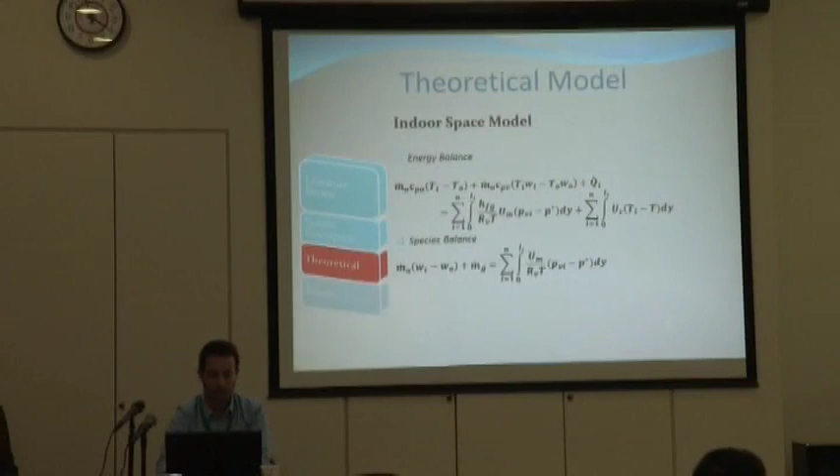Nice project. Anybody has a question?

Josh, you mentioned that the system in the future will function on its own to be sustainable, but in the model that you showed us, there was a pump. How would you work about that?